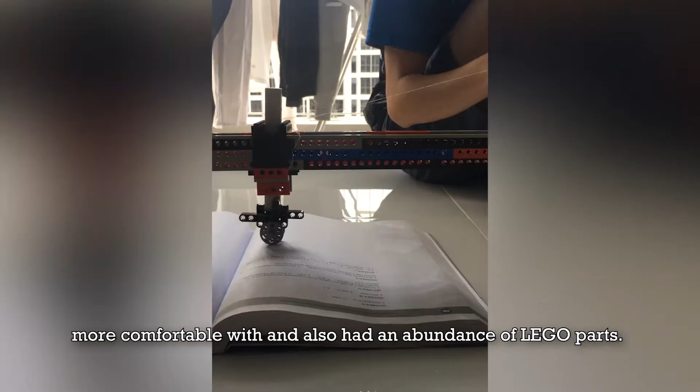The team was supposed to start off with a couple of prototypes, but we decided to go with Lego as it was what we were more comfortable with and we had an abundance of it. We used a couple of prototypes to test out the mechanisms we had in mind, as well as to decide on the dimensions for our characters. The early prototyping proved to be very useful, as we were able to identify key issues in our design and figure out what worked and what didn't.

From there, we ideated further and came up with more concepts and designs. With the insights we have gathered, our prototype and feedback from our lecturers, we started to fabricate our first generation prototype with actual materials. Initially, we planned to have 5 layers of objects in our puppet show, one for background, one for tower, one for princess, one for the man, and one for the monsters.

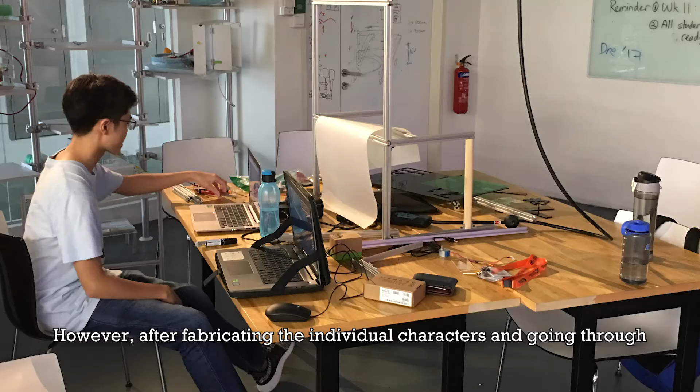However, after fabricating the individual characters and going through the review with our lecturers again, we were able to bring down the whole thing to only 2 layers, with everything as close to the screen as possible. The team brought the background, the princess, and the castle together into 1 layer with the screen, while the monsters and man had their own layer each.

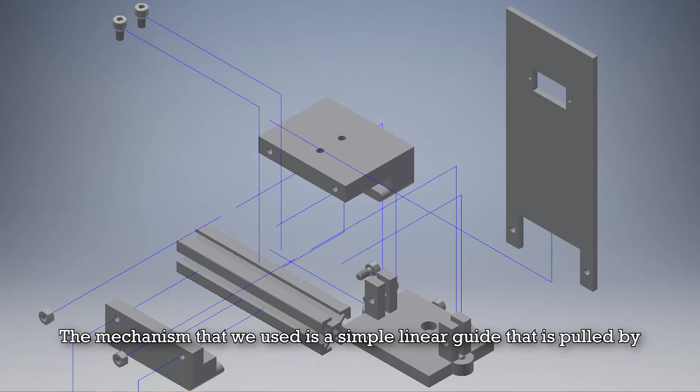So for our shadow puppet show, there are 3 main moving characters: One Punch Man, the princess, and the 3 monsters. So I'm going to talk about the mechanism and motion behind one of our characters, called One Punch Man. For this character, there are 3 types of motion. The first motion is the whole body along the x-axis. The mechanism we use is a simple linear guide that is pulled by a continuous servo with a pulley and a string.

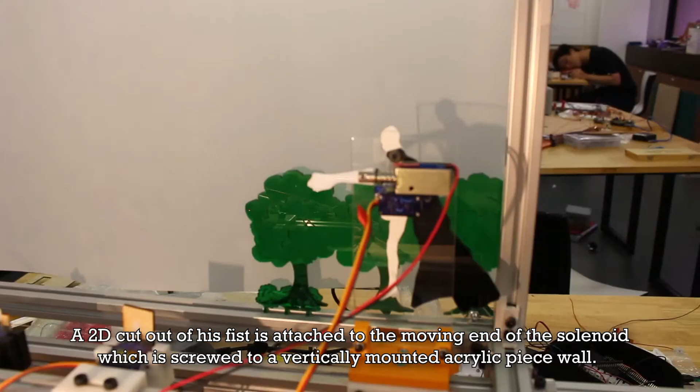The second motion which the One Punch Man has is his punching motion. The punching motion of the One Punch Man involves an acrylic piece and a solenoid. A 2D cutout of his fist is attached to the moving end of the solenoid, which is screwed to a vertically mounted acrylic wall. When the solenoid is turned on, the piece retracts, and when it's turned off, the spring will propel the piece forward, simulating a punching motion.

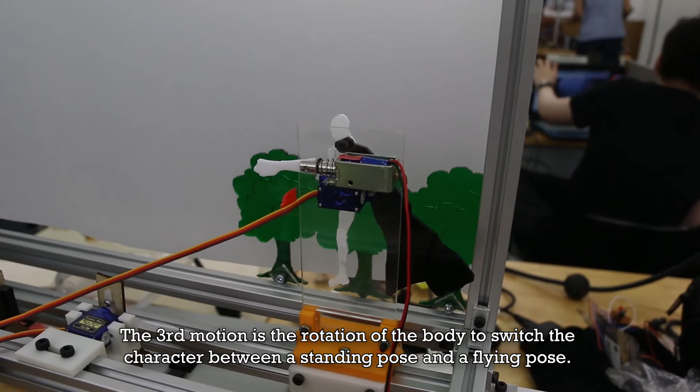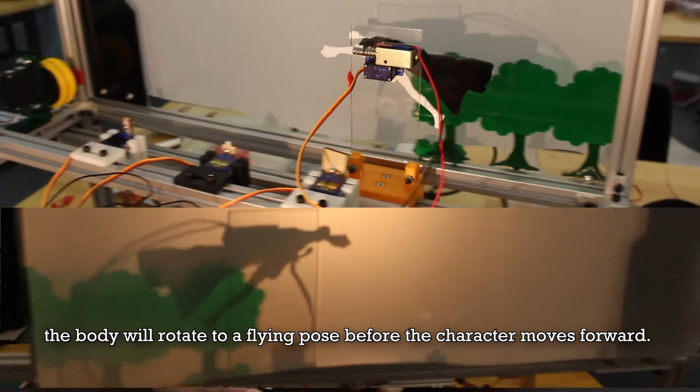The third motion is the rotation of the body to switch the character between a standing pose and a flying pose, with the acrylic body cutout attached to a servo motor mounted to the same acrylic wall the arm is attached to. The body will rotate into a flying pose before the character moves forward.

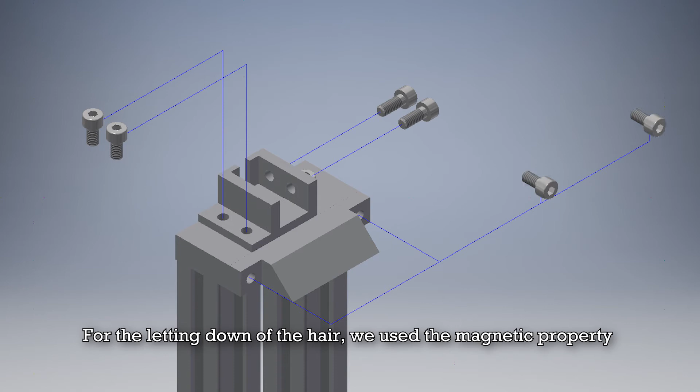The next character is the princess. In the story, there is the dropping action of her hair as well as the falling movement of the princess. There are two movements for this character. For the dropping of the hair, we use the magnetic property of the solenoid, and when the solenoid is turned on, the iron chain which represents her hair is attracted to the solenoid. And when the solenoid is switched off, it will demagnetize and the spring will push the hair off the slope with the other end of the hair hanging on the princess.

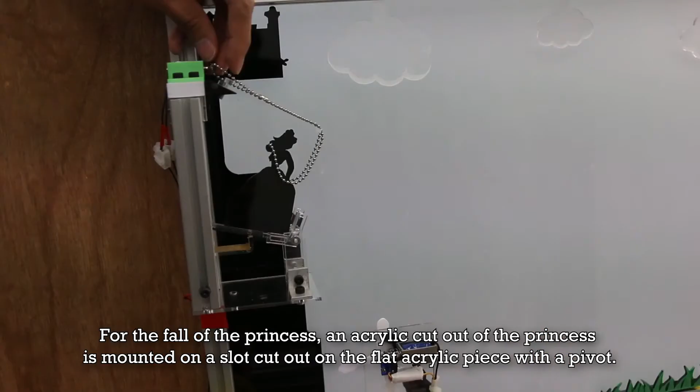For the fall of the princess, an acrylic cutout of the princess is mounted on a slot cut out on a flat acrylic piece with a pivot. On the other end of the pivot is a solenoid which would tilt the platform and cause the princess to fall when the solenoid is turned off.

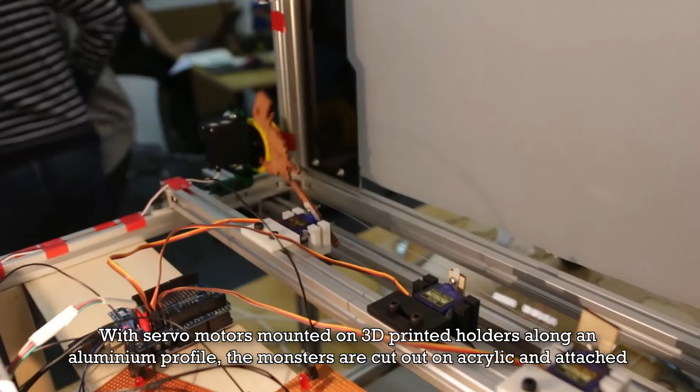The monsters are the final characters in the show, with servo motors mounted on 3D printed holders along with an aluminium profile. The monsters are cut out from an acrylic piece and attached to the servo, which would swing the monsters from below the screen to the screen itself.

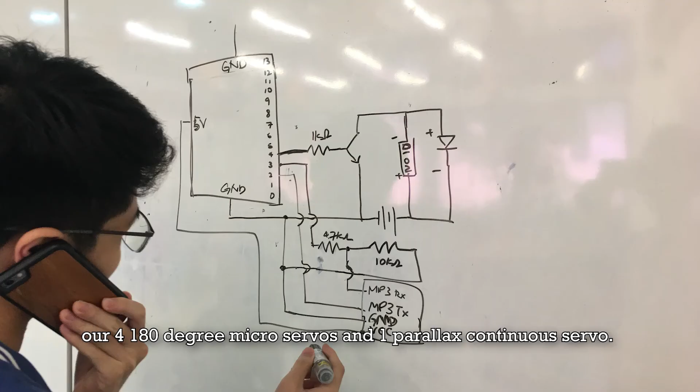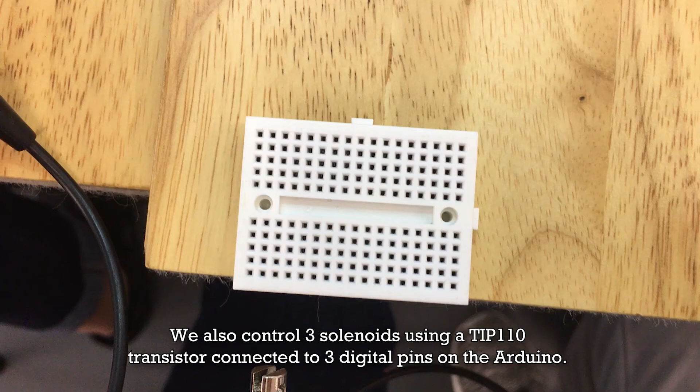For the programming and electronics, we use Adafruit's 16-channel servo shield to control our four 180-degree micro servos and one Parallax continuous servo. We also purchased an MP3 player from Continental Electronics Enterprise at Sim Lim Tower, and we chose that particular MP3 player as it is able to read MP3 files on an SD card and output audio while only taking up 2 digital pins on the Arduino. We also control 3 solenoids using a TIP110 transistor connected to 3 digital pins on the Arduino.

To ensure a smooth integration of all electronic components, we use a total of 4 contact switches to keep track of the position of the linear guide that One Punch Man is attached to, with each switch corresponding to a certain part of the story. We faced many issues regarding the electronics, such as errors in wiring, connecting pins, calibrating the servos, especially the continuous servo, as well as getting the MP3 player to work. However, with the guidance of Miss Rubina and the help of the internet and fellow EA students, we overcame these hiccups with no problem.

To conclude, this project has taught us many valuable lessons: fabrication of parts using laser cutters and 3D printers, planning and executing a plan that had to be agreed amongst groupmates, troubleshooting problems with our design with the help of our lecturers, and many more. Through this, we have grown to appreciate each other's strengths and weaknesses and help out when needed. This project has bridged the gap between mechanical and electrical students as we find ourselves in each other's shoes, and we hope that we can do more projects like this.